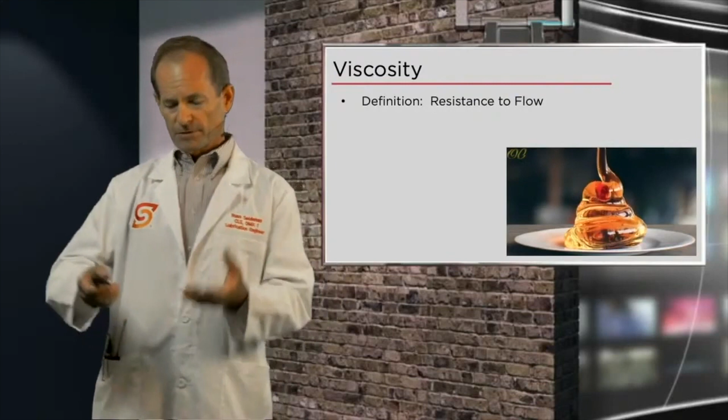All right, so base oil, additives, that's the basics of that. The next basic we're going to look at is viscosity. Viscosity is resistance to flow. This idea is pretty intuitive to most of us. You pour some water out, you pour some honey out, you get an idea - one has a higher viscosity, one has a lower viscosity. We all have that idea.

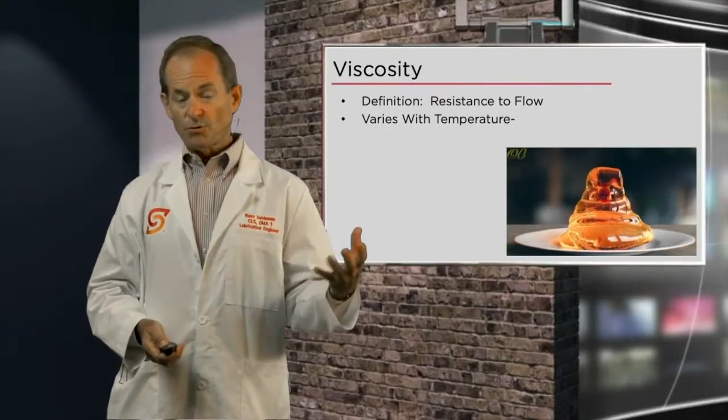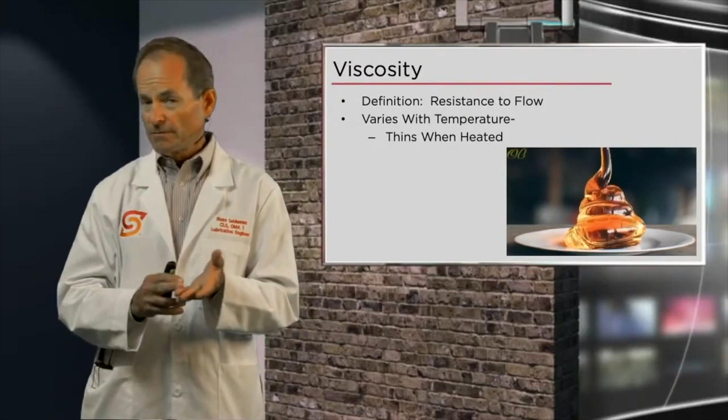It's important to note that viscosity varies with temperature. Now, how much it varies is another question. The stuff does thin when heated, and everybody who's ever warmed up maple syrup can see that happen. It happens with syrup, it happens with motor oil, it actually happens with water too. You need the right equipment to measure it carefully, but as you heat water up, it also thins. Well, let's leave water and go back to our motor oil and take a look at this.

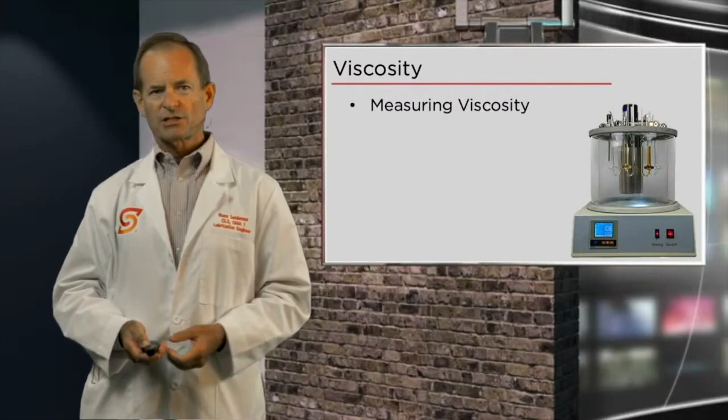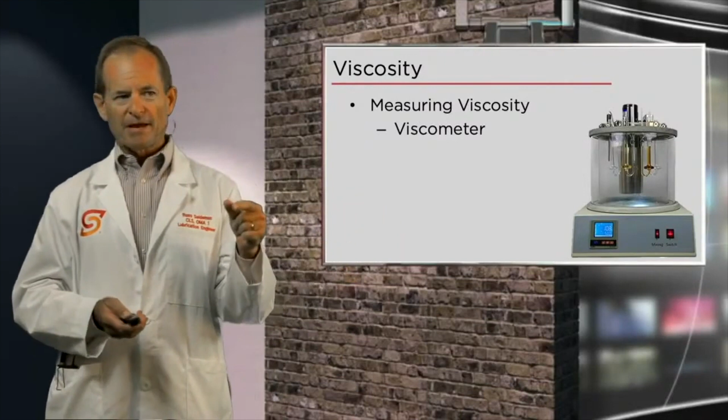This device here is a way we measure viscosity. This is a bath viscometer, a J-tube bath viscometer. Viscosity is measured in these devices, and you can see that area there is a heated bath. We maintain a constant temperature because, as we said, viscosity varies with temperature. Inside this bath are these J-tubes or U-tubes that the oil is run through. Here's an animation example of how it goes through there, and you can see we've got a stopwatch as part of this process. So let me go ahead and run this for you.

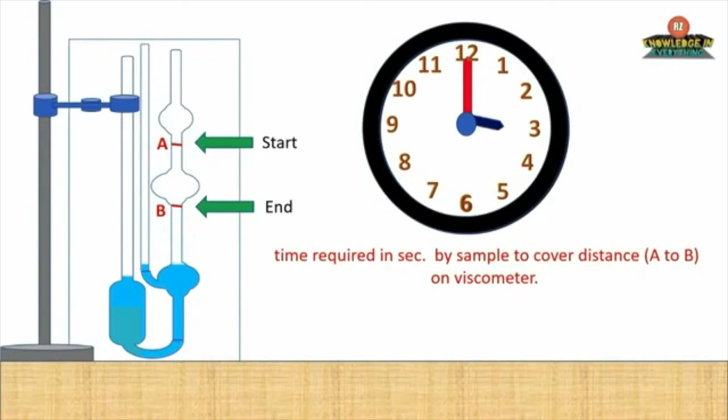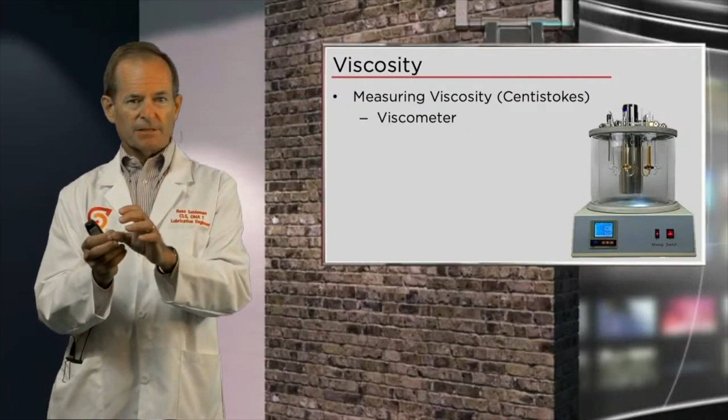This J-tube gets filled up with oil, and we let it run, and we start the stopwatch now, and we stop it at point B. So we've timed how long it's taken this oil to flow through this known segment. We take that oil and that timing, that number of seconds, and we take a certain calibration code from the J-tube and plug it into another formula, and we end up with a number.

That number is the viscosity. The typical unit of viscosity measurement - and there are a whole bunch of scales - but most of them are pegged back to this unit called the centistoke. Centistoke viscosity then is also always reported at whatever temperature our oil bath was at.

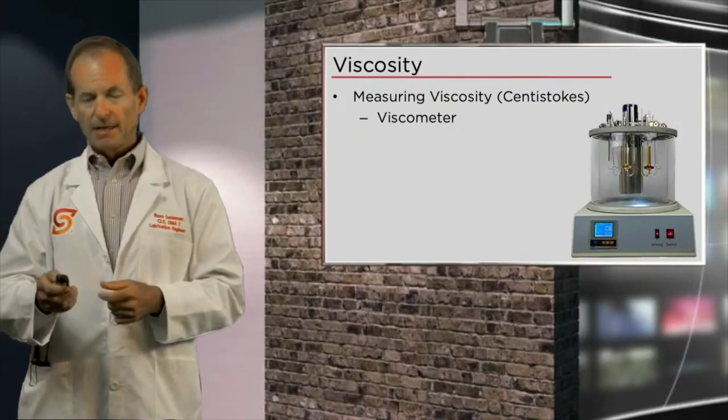Now in the case of engine oils, we do this testing at 100 degrees C, which is about 210, 211 F. We do it at that temperature because that's a typical temperature an engine oil is going to be seeing in service when it's operating. So it gives us some realistic view. We heated it up there, we went to our chart, we got the number, we found out what our viscosity was in centistokes.

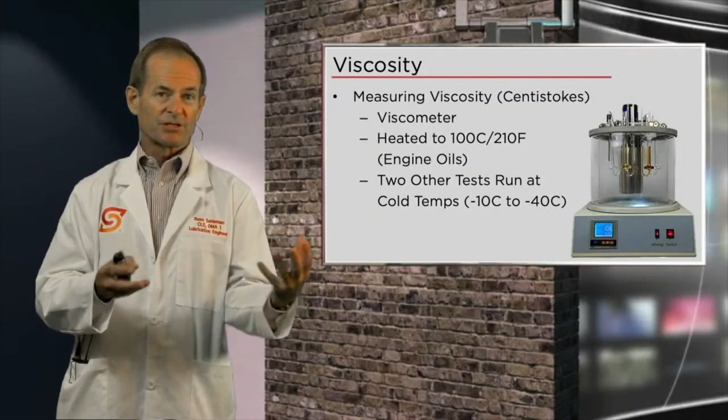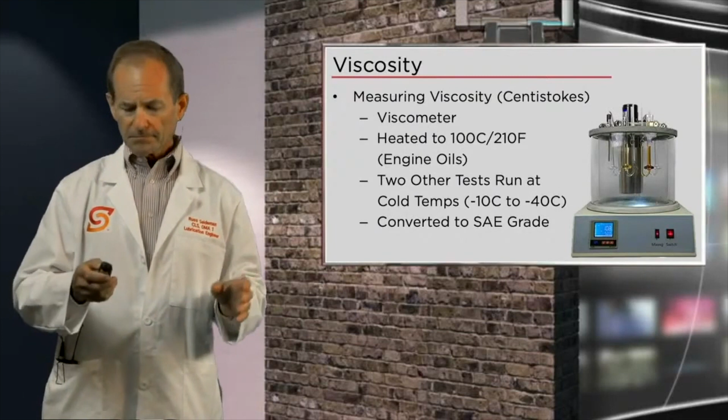So we run these cold temps, we take this other temp that we ran at 100 degrees C, and we convert it to an SAE grade. Now how do we do that? Well, the SAE is the Society of Automotive Engineers, and going way, way back, they developed a viscosity grading system called the J300. The J300 chart is this chart right here. We take our viscosity information from the cold tests and from the warm test, and we go to the J300 chart. Let's take a close look at that chart.

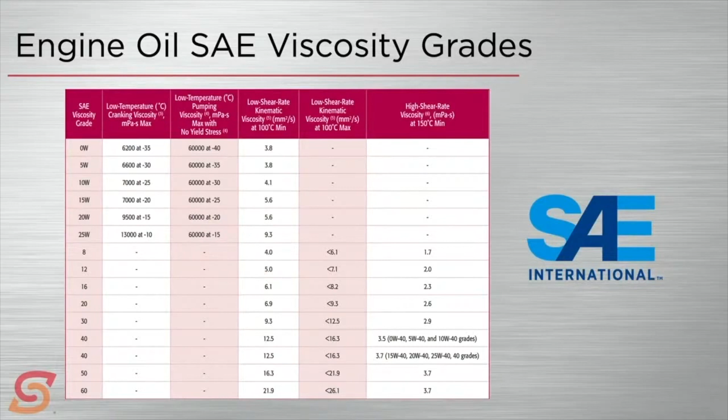You can see the chart has along the left the actual SAE viscosity designations. The next two columns in from the left are the results of your cold weather, cold temperature tests - what kind of numbers you came up with. Then the next two after that are some of the higher temperature numbers. So if your cold temp tests showed you to have a 5W, and your test at 100 C showed you to have a 30, your resulting engine oil grade is a 5W30. It is just that straightforward - run the tests, you go to the SAE chart, you get your viscosity grade.

Okay, so that's pretty clear how that's done. And those tests from time to time are slightly modified, but they've been around and established for quite a while.

What you might need to know, for your useful information, since we're all familiar with the common grades in use, is what the upcoming trends are. There's been a trend in both heavy-duty engine oils and passenger cars toward lighter viscosities. The reason should be pretty straightforward: which is easier to swim through, a swimming pool of honey or a swimming pool of water? It's easier to swim through the thinner stuff. You have to do a lot more work to get through the thicker stuff.

Which one is going to give you better economy in an engine, one fighting thick stuff or one that doesn't have to fight thin stuff? That's exactly how it works. Thinner oils give better fuel economy, assuming you've designed your engine well enough to tolerate thin oils without sacrificing wear. What's remarkable is that is the case. Engine designers and builders are doing remarkable things with some very, very thin oils.

And that leads us to the current trend, the newer viscosity grades. Driven by fuel economy and emissions, we're talking about 0W16. 0W16 is actually in the US market right now. Coming along are 0W12 and 0W8 — these, I believe, are currently in Japan, with Honda developing with these. 0W8 is remarkably thin stuff.

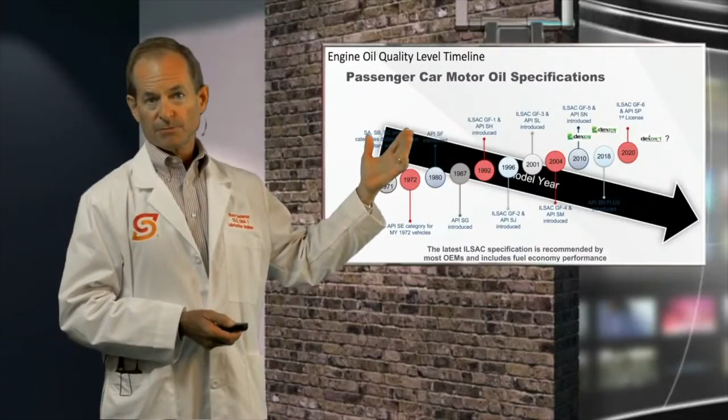All right, I'll talk about that in the history slide here next. The ILSAC came in and started joining in. They started with their specification GF-1, and that's been growing to GF-2, GF-3, and on to now GF-6.

So here's the history of how the whole thing was structured. For a long time, for decades, there was a group called the tripartite group of the API, the SAE, and the ASTM, who all got together in committee meetings and group meetings, and they mashed together and figured out what the engine oil performance standards should be.

Well, in 1992, the ILSAC was formed by the OEMs of the engines themselves for North American sales, who decided that the API and this whole tripartite system wasn't working fast enough, that it was not keeping up with the engine technologies they were building off into the future. So they wanted a bigger say, and they generated their own group to do it and their own specifications, starting with GF-1, GF for gasoline fired. So they've got their own structure starting then.

In general, we've got a match between the two of them as they go along. These two groups work cooperatively in developing these tests and specifications so that there always has been a correspondence between the GF classification and the API service classification. And that's why both GF-6 and API SP are coming on at the same time.

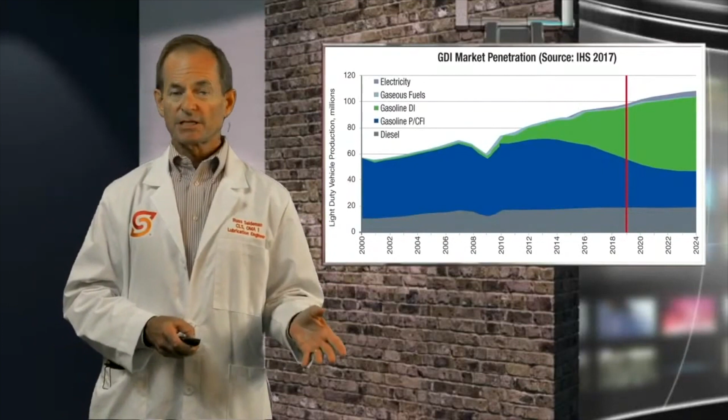And then came the onset of gasoline direct injection, that's the green area. We're right now where that red bar is. You can see it's already made huge strides into the engines out there, and it's predicted to keep going into the future even more. So this technology, because it's so effective at improving power density, is here to stay.

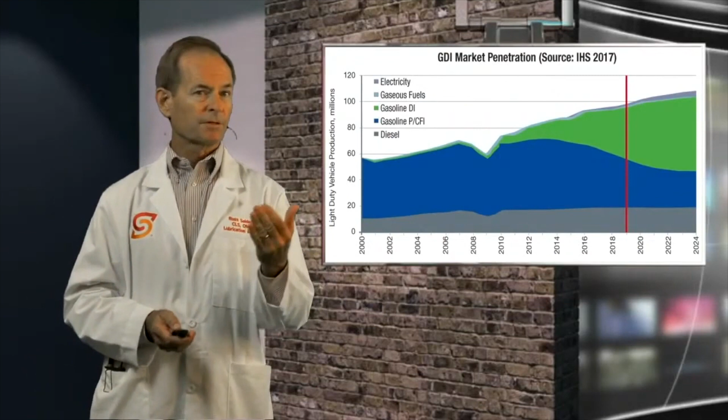The next engine design change worthy of note is advanced turbocharging. Turbochargers by themselves have been around a really long time, certainly in diesel trucks. They found their way into passenger cars after a while, not without some hiccups and starts and other challenges. Advanced turbochargers have reduced lag, and they've worked at resolving lubrication-related issues, at least in the turbo design itself. So there's a lot more turbocharged engines out there now.

Again, another problem with those is low speed pre-ignition, especially when coupled with gasoline direct injection. That low speed pre-ignition problem comes up again. And turbochargers can also give you challenges with high temperature deposits and varnish.

And as you would imagine, there are extremely high temperature things going on in turbochargers.

Other engine design changes include variable compression ratios. This is an interesting concept, and I'll have a picture of this in a little bit. A variable compression ratio engine can be prone to both varnish and sludge.

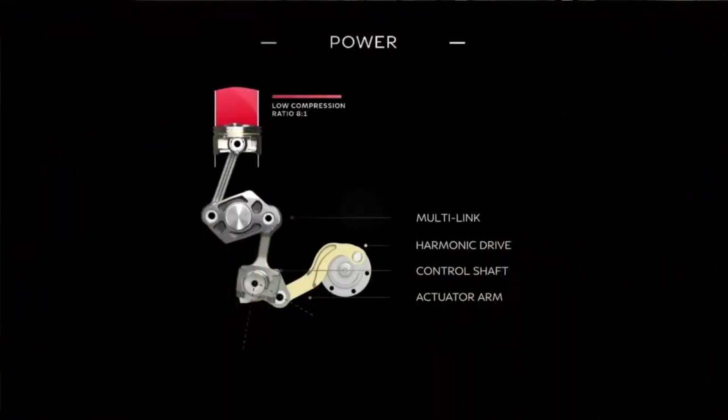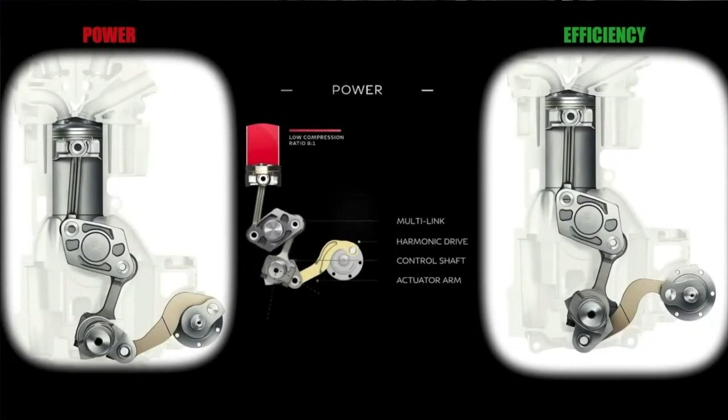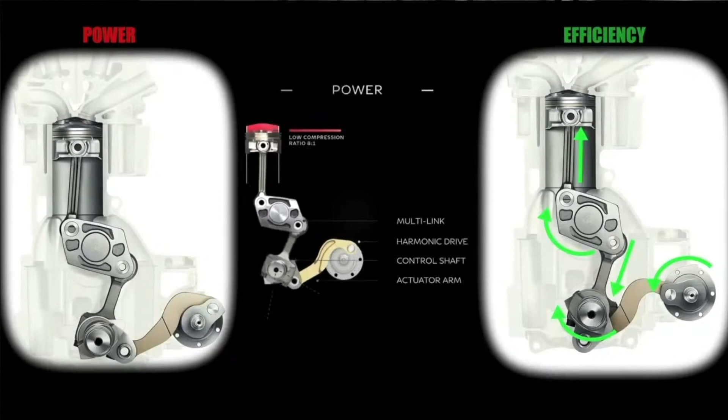You just saw that cam thing move, and it changed from red to green. That's the kind of motion that's going on. Your power stroke, you're in this position, you've got your 8-to-1 compression ratio going. Now you shift it over, and you get a longer stroke, and you're in the efficiency mode. Back, saw that shift, went back to the power mode. These shifts take place over the period of like a second or so when you're on the fly.

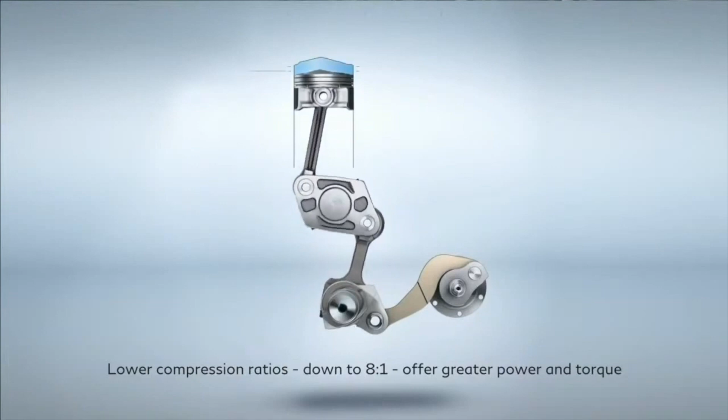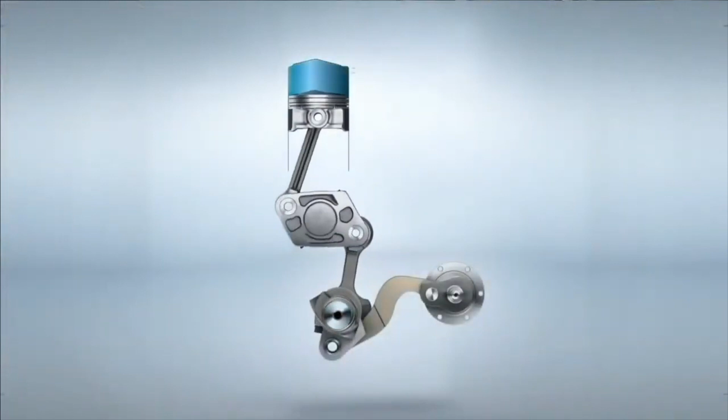Here's some more imagery of that. Greater power and torque down to 8-to-1. And now you can see that cam thing has moved, and you're getting a higher compression ratio, something like 14-to-1. Very interesting technology.

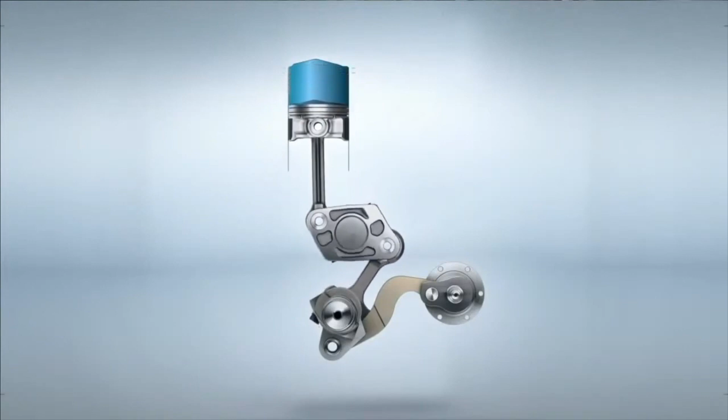The next notable engine design change that you may have experienced yourself is start-stop engines. A start-stop engine is one that saves idle. So you come up to an intersection, you put on the brake, your car comes to a stop, your engine shuts off. The first time you drive one of these in a rental car, you say, 'What's going on here?' But you find out that even when you take your foot off the brake to go over to the accelerator, by the time you're at the accelerator, the engine's been started back up for you. This is kind of strange.

This is real common anymore on newer vehicles. But as you might expect, something that has to start and stop a lot is going to be more prone to wear. It's also going to be more prone to creating sludge inside. So we've got to consider that with our new oil. That's an effect of the design change.

The final design change I wanted to talk about has to do with the need for fuel economy. As it should be pretty obvious by now, the engine OEMs are all but obsessed with engine economy. We talked about how the viscometrics play an important role with that. Your thin oil contributes to great economy. Well, what happens if your nice thin oil you put in there, as it starts to age after 1,000 miles, suddenly starts to thicken up from aging? What happens to all your fuel economy savings? Well, they go away.

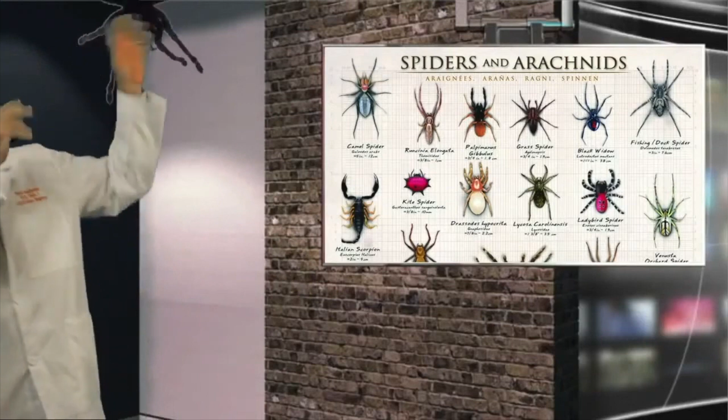So I will spare you the spider chart, you don't have to see one. But we will go over each of these features of GF-6, the important features here.

The first, as I've been probably beating into you by now, is to prevent low-speed pre-ignition, LSPI. LSPI is bad - it does engine damage, that's first and foremost. It's also very noisy, creates engine noises, and results in poor performance, like poor acceleration and stumble. So it's a bad thing.

What is it? Here's a little more detail on what we know about it, or what the research has shown us. The most susceptible are turbocharged gasoline direct injected engines running at 1200 to 2700 RPM. That's where the term low speed comes from, as opposed to pre-ignition that shows up at 4,000 or 5,000 RPM or something like that.

It's a very violent knock, leads rapidly to engine damage, and there are multiple causes - fuel-related factors, mechanical-related factors, and lubricant-related factors. The lubricant-related factors aren't asking the lubricants to address mechanical things, but they do address lubricant-related problems like deposits, as well as oil droplets that might be present in the combustion chamber.

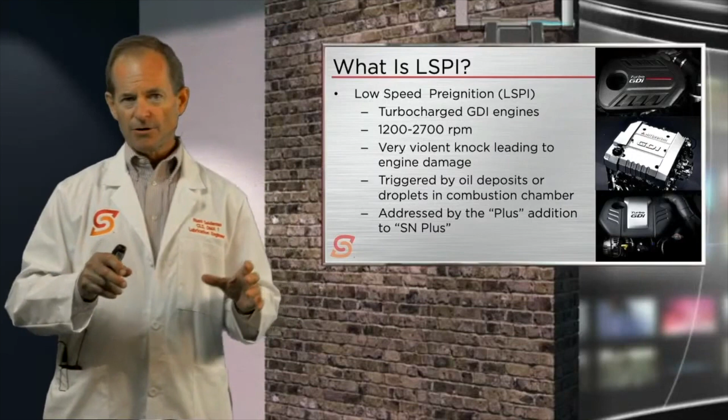We've borrowed some video from our friends at Phillips 66 to give you an idea of what normal combustion versus something like LSPI might look like. This was done from a study on a fired cylinder with a glass cover, where they could photograph the combustion taking place and then slow it down. So we're going to take a look at some normal combustion and then some abnormal combustion.

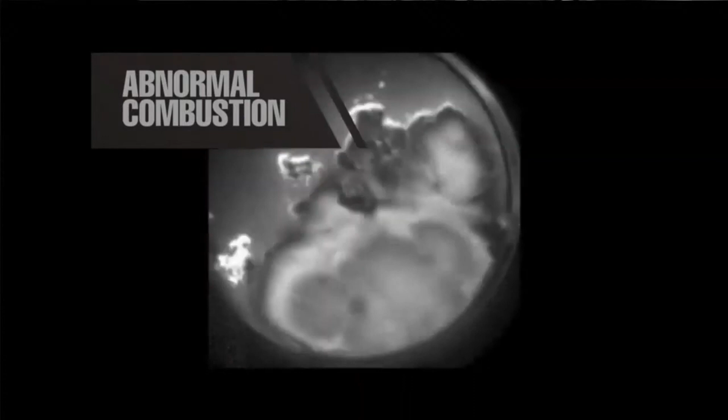Now, when you have LSPI, you end up with ignition that's not in the middle, but starting towards the edge - see how it started toward the edge and moved its way across? This is not what the engine was designed for. This causes the piston to move in ways to the side it wasn't designed for, causing an uneven load on the connecting rod and crankshaft. Lots of bad things going on with abnormal combustion. It can also cause a hot spot at the place this is happening and weaken the metal, or melt through the metal there.

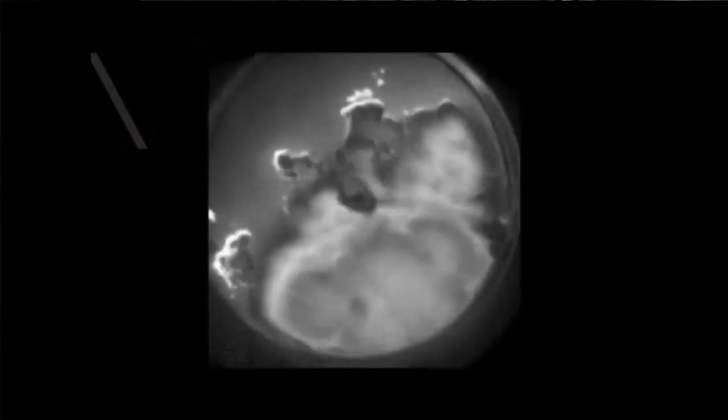All right, so that's the LSPI part of this. Let's talk about some of the other new features involved in our GF-6 SP oil.

The next is this reduced cam chain wear. The prevalence of chains driving around in these engines is becoming greater and more important. As all of this stuff is so critically timing controlled, you really can't afford to stretch or wear your chain. If those of you who've been around long enough remember, when I was working on a lot of cars earlier, your timing chain could jump a tooth or two and keep running. It's crazy, that couldn't happen now at all.